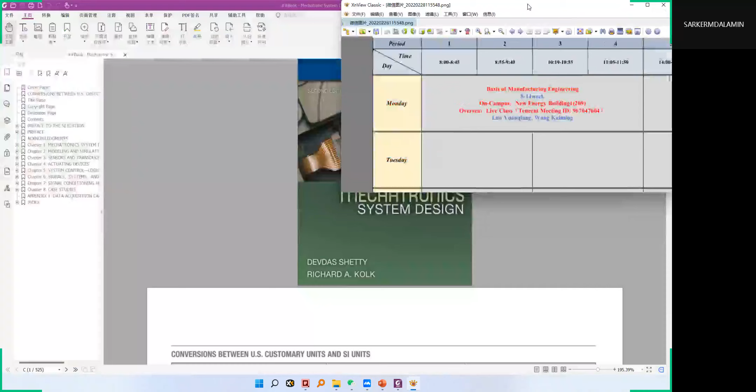This is the book for our class. Laoshi, do you have the PDF version of this book? Yeah, this is the PDF. Can you send it in the WeChat? Okay, no problem.

You belong to class 1 or class 2? Laoshi, it's combined, it's the same class. Yeah, it's combined. Okay.

I give you the PDF version of Mechatronics, you can read it by yourself. Thank you. Now I have the PPT, you can read it.

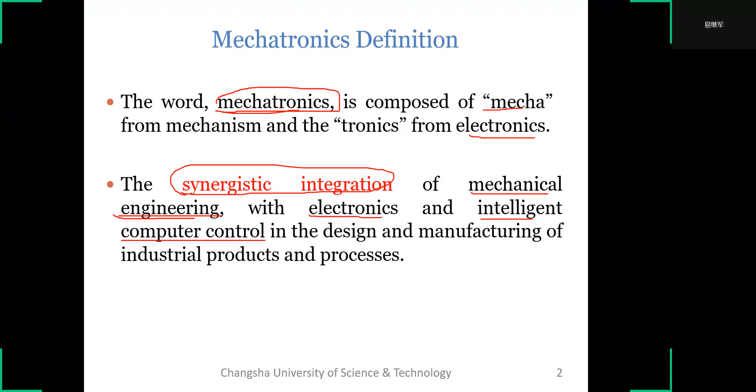Mechatronics is the application. Mechatronics is a methodology. So we know mechatronics can be thought of as an application: complex decision making to the operation of a physical system. Or we can think of mechatronics as a methodology used for the optimal design of electromechanical products.

In the last semester, we learned something about electromechanical technology. So in mechatronics, we may review the electromechanical technology.

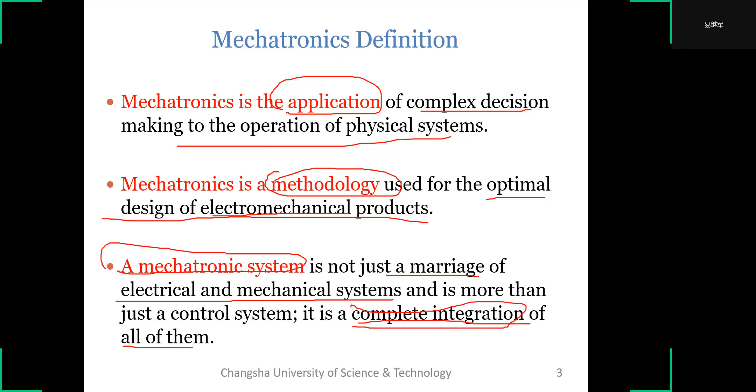Mechatronics definition: Mechatronics engineering is about analysis, design, manufacturing, integration, and maintenance of mechanics with electronics through intelligent computer control.

Analysis - we need to know how to analyze mechanical products, such as FEA, finite element analysis.

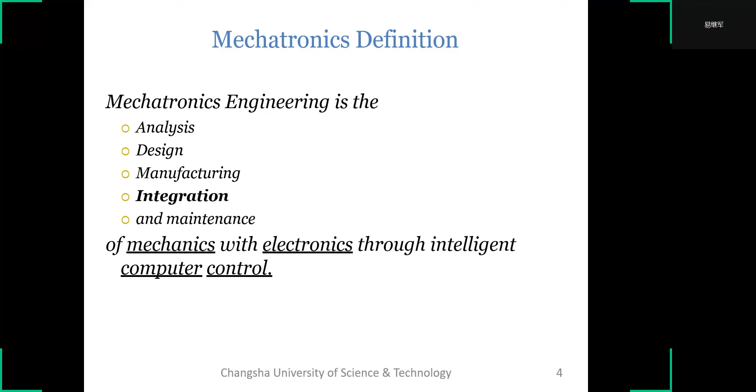This is a diagram that shows mechatronics as the center of many disciplines.

The center is mechatronics. Mechatronics consists of mechanical systems, electromechanics, electrical systems, control electronics, control systems, digital control systems, computer, and mechanical CAD.

This discipline puts them together, integrates these disciplines together, and we can get mechatronics.

This is a mechatronics product: aerospace, medical, xerography, defense systems - this is a consumer product. Manufacturing, material processing, automotive - this is technology, this is mechatronics, this is the product of mechatronics. From this figure, we know the relation between the product, the technology, and mechatronics.

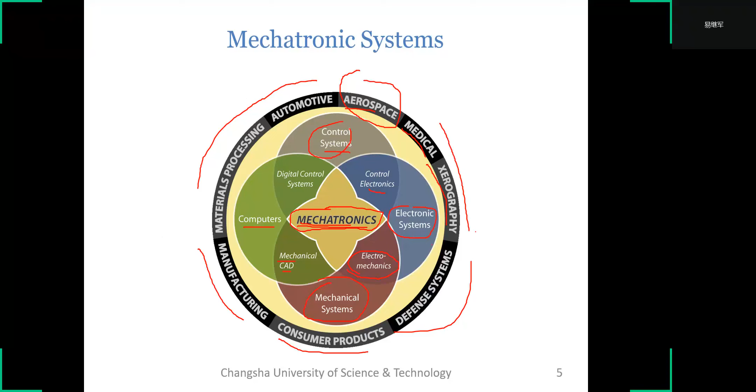Now I introduce the history of mechatronics.

Mechanical engineering. Laoshi, can you please mute all the microphones? Oh, okay.

Mechanical engineering experienced exponential growth in the early 19th century because of the industrial revolution, growing fast. After that, after the rise of semiconductors, semiconductors and computers have revolutionized all engineering products and processes, which in turn affect mechanical engineering.

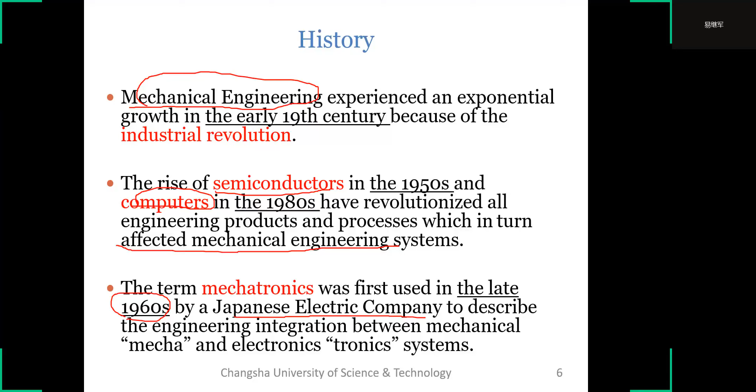Since then, it has spread throughout Europe and is growing in the USA. Today, many mechanical systems use some form of electronics and computers to control its function, its functionality. Mechanical system engineering has gained much recognition and importance in the industrial world.

Today, we know many products use mechatronics technologies to make the product more modern and more beautiful.

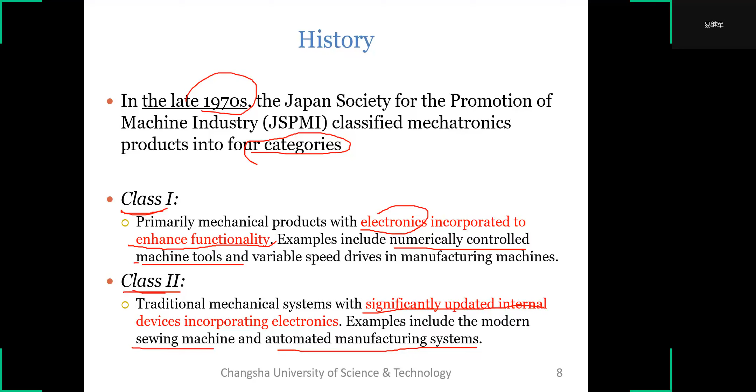Class 3: systems that retain the functionality of the traditional mechanical systems, but the internal mechanisms are replaced by electronics. An example is the digital watch. The old type of watch is a machine, but now the watch is an electronics product.

Class 4: products designed with mechanical and electronic technologies through synergistic integration, which means mechanical and electronic technology work together, they cannot work separately. Examples include photocopiers, intelligent washers and dryers, rice cookers, and automatic ovens. This keyword is synergistic integration.

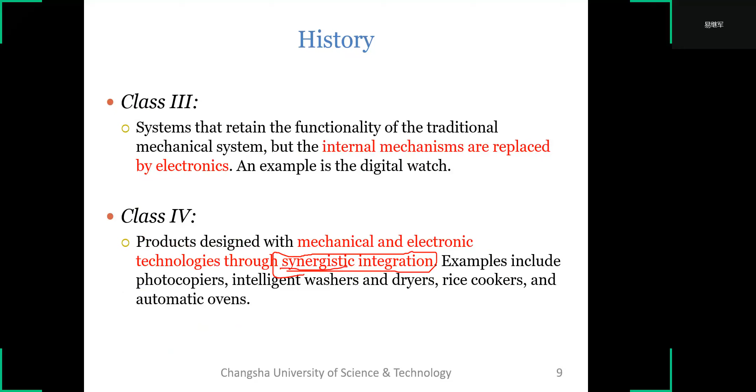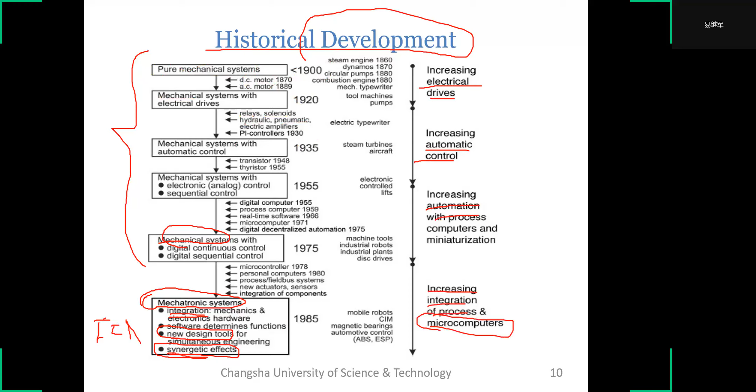The key point is the synergistic effect. We can see the history of development. From this figure, we can see mechatronics follows electronics development - electrical drive and auto control, automation, increasing integration of process and the microcomputer. This is the evolution of mechatronics.

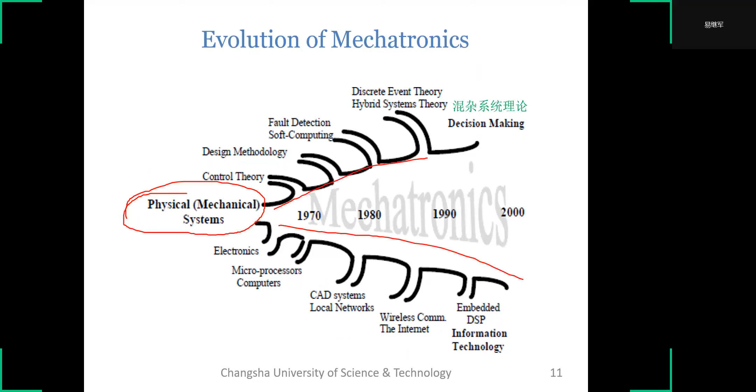Firstly, we have the mechanical systems. When we have the wheel of mechatronics, we can see two branches: this is about control, and this is about electronics.

Control theories, design methodology, fault detection, discrete event theories, hybrid system theory, and decision making. Control systems used to make the decision for the control systems, used as software.

This is the development of electronics used as hardware: microprocessors, computers, CAD systems, local networks, wireless communication, and the internet. Embedded DSP, information technology. Now electronics is combined with information technology.

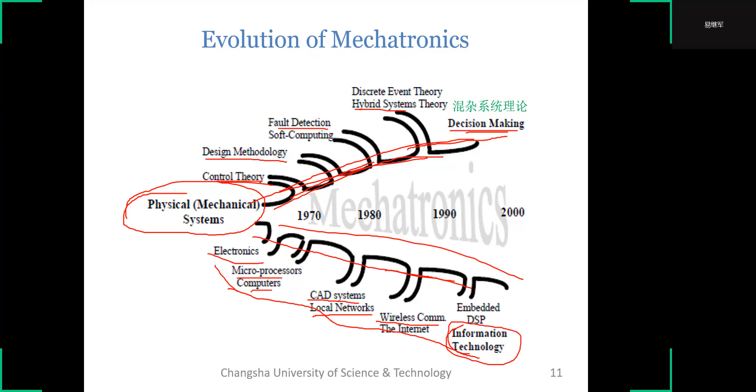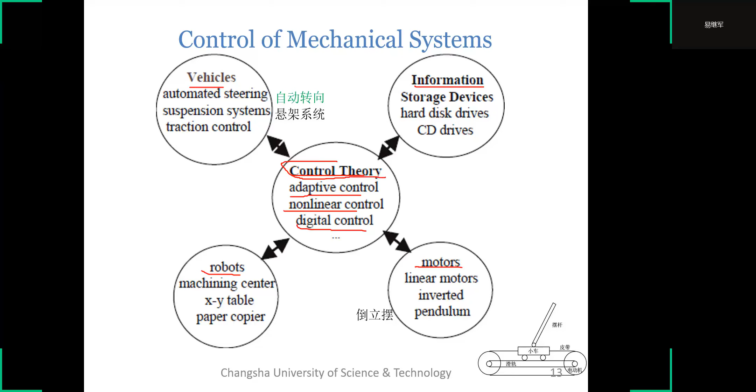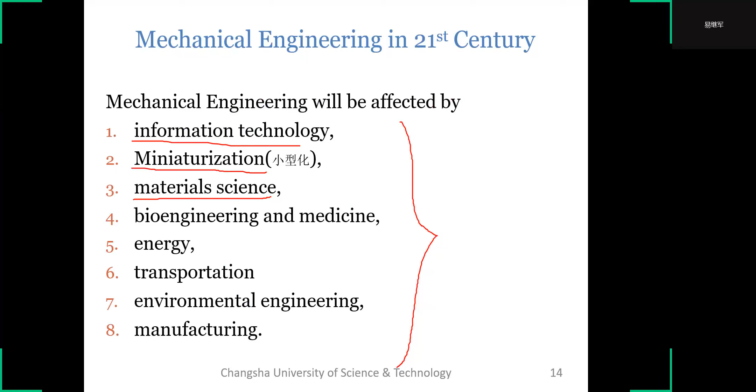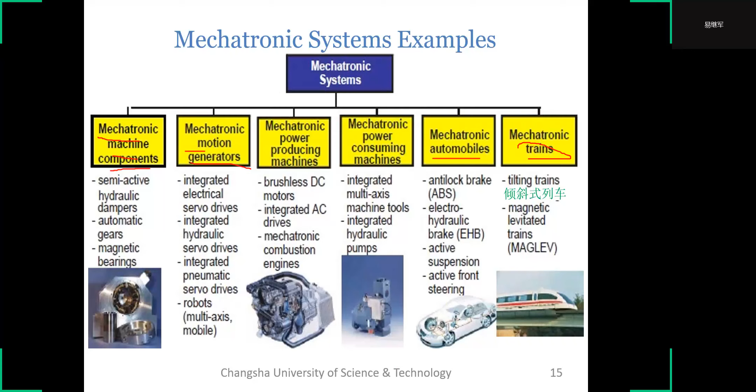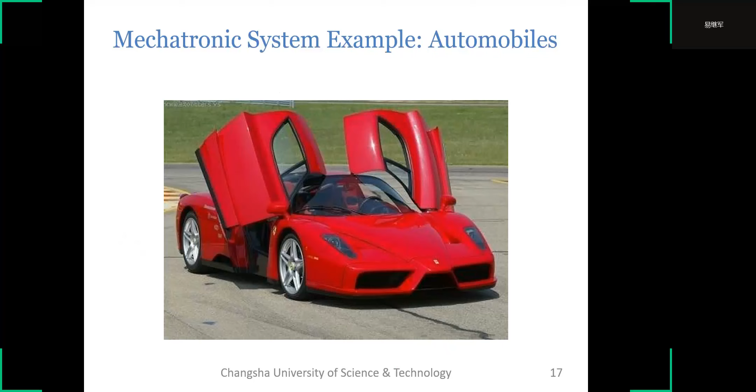Next, I introduce a typical mechatronical system example: the automobile. When the automobile was invented, it was a pure machine. Until the 1960s, the radio was the only significant electronics in automobiles.

The radio was the only electronics; all other functions were entirely mechanical or electrical. They worked separately, not together, such as the starter motor and the battery charging systems. They worked separately, not with the mechanical parts.

Before 1960, modeling of the combustion process showed that for increased fuel efficiency, there existed an optimal time when the fuel should be ignited. This optimal timing depends on load, speed, and other measurable quantities.

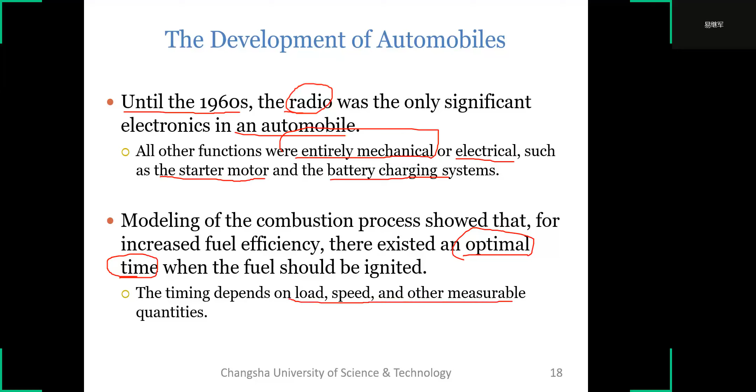The electronic ignition system was one of the first mechatronic systems to be introduced in the automobile, in the late 1970s.

The electronic ignition system consists of a crankshaft position sensor, camshaft position sensor, air flow rate sensor, throttle position and rate of throttle position change sensor, and a dedicated microcontroller that determines the timing of the spark plug firing.

The controller is a microcontroller. So after the successful application of electronic ignition systems, ABS was introduced into automobiles in the late 1970s. ABS is used for brake systems, to prevent the wheels from locking when we brake.

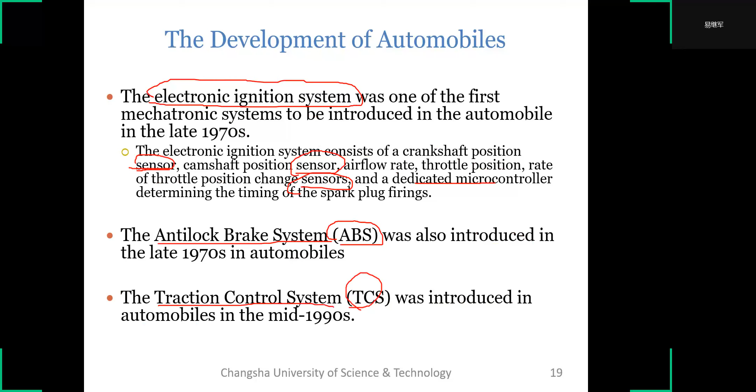In the development of automobiles nowadays, there are about 30 to 60 microcontrollers in each automobile. These processors are used for engine management, transmission control, airbags, ABS, TCS, VDC, etc., instrument cluster, air conditioning systems, seats, mirror control, and window lift systems.

These systems can work separately, controlled individually by microcontrollers. Last semester, we learned something about microcontrollers, so now we can use them in mechanical products.

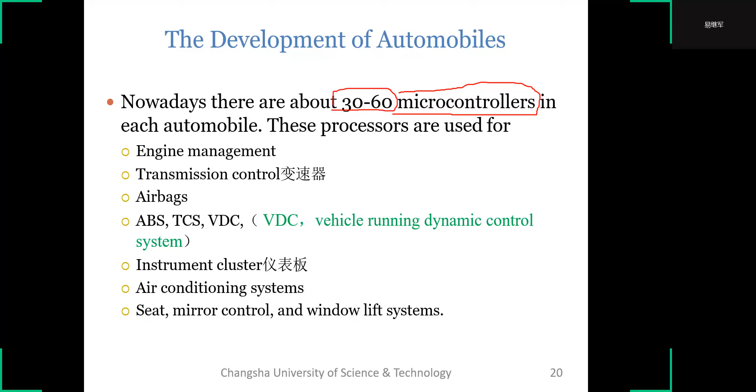New applications of mechatronic systems in automobiles include semi-autonomous to full autonomous automobiles, safety enhancements, emission reduction, intelligent cruise control, brake-by-wire systems, wireless network of automobiles to ground stations, and vehicle-to-vehicle communication.

Telematics combines audio, hands-free cell phone, navigation, internet connectivity, email, and voice recognition.

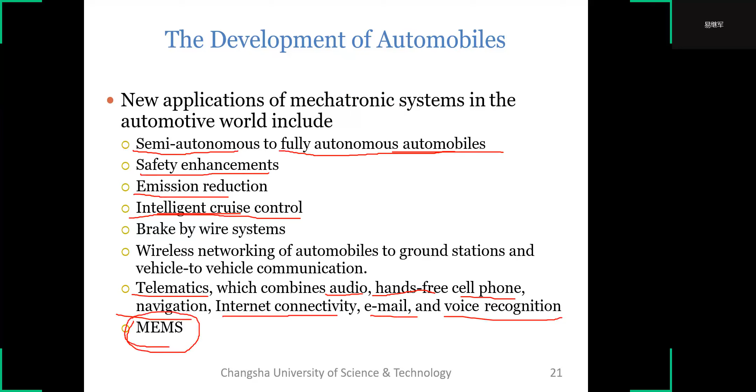This is micro electrical mechanical systems, or micro electromechanical systems. These technologies will be applied to modern automobiles.

This is an example of autonomous vehicle systems. Maybe you've heard about autonomous vehicle systems, which means no driver in the car. If you want to make an autonomous vehicle system, you need to add certain elements to your system.

These include radar, a CCD camera, and DGPS or FOG-based dead reckoning. If you add radar to the system, you need a radar imaging processor. If you use a CCD camera, you need a Matrox vision processor. If you add DGPS, you need a DGPS processor. These are the sensors for the autonomous vehicle system.

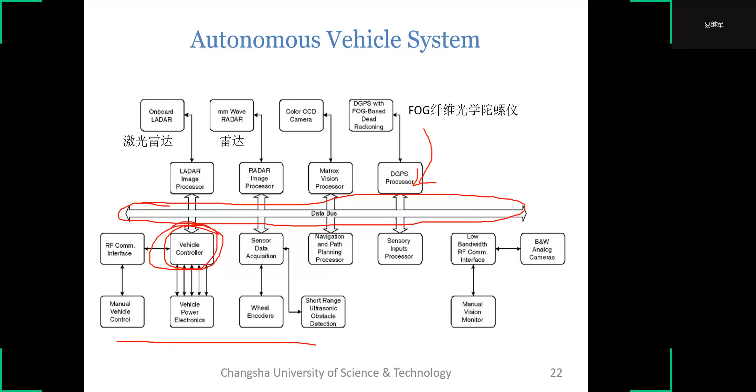From this figure, you know that if you want to make an autonomous vehicle system, you need many elements and parts. But essentially, this is just like a control system: there's a bus, a control center, and sensors that give signals to the control. This is a computer controlled system, and all these parts will work with the vehicle.

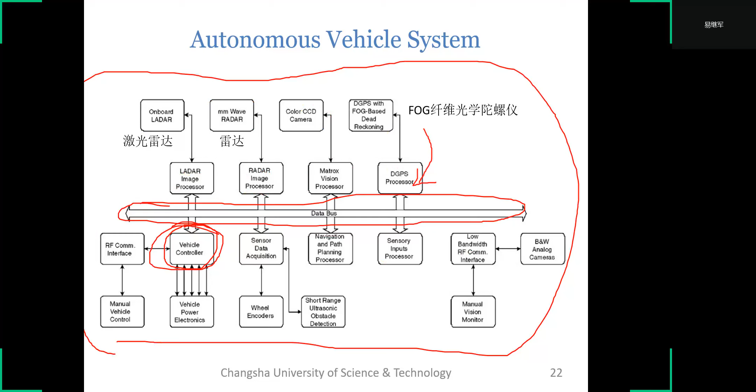So from here we can see mechatronics is an evolutionary process, not a revolutionary process. Mechatronics is developed from mechanical systems, so it's an evolutionary process. Mechatronics is about the synergistic integration of mechanical, electrical, and computer systems.

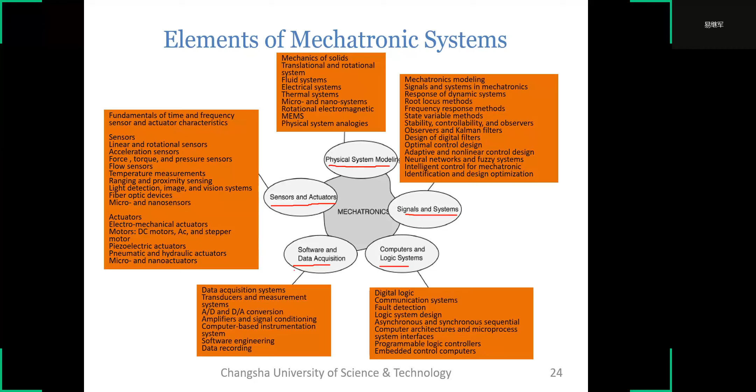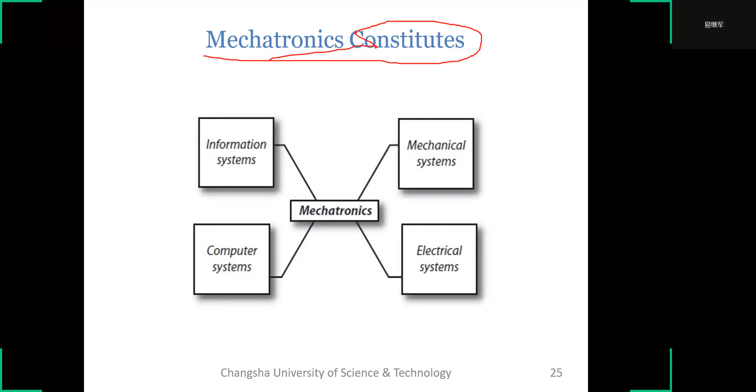Here is a simple diagram. Mechatronics constitutes information systems, mechanical systems, computer systems, and electrical systems. Firstly, mechatronics is made of mechanical systems and electrical systems. Now, mechatronics includes information, computer, mechanical, and electrical.

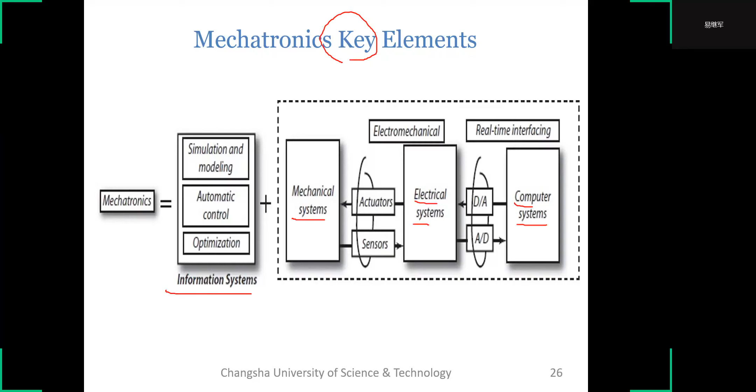Mechatronics key elements are shown in this diagram about mechatronics. From this diagram, we can see the key elements: information systems, mechanical systems, electrical systems, and computer systems. Information systems include simulation and modeling, automatic control, and optimization.

Mechatronics is the basis of mechanical systems. Mechanical systems are driven by the actuator. The signal comes from the electrical systems. The electrical systems' signal is from computer systems. So the signal flow is from the computer system to the electrical systems to the mechanicals. After that, the signal is fed back by the sensor to the computer systems. So these are the key elements about mechatronics.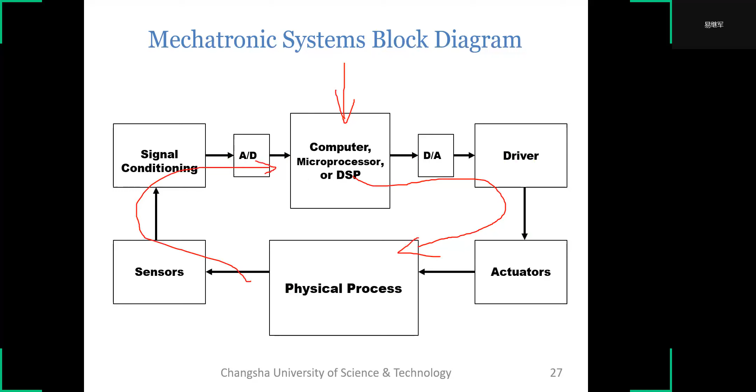Mechatronical systems block diagram. Here I introduce mechatronics and the difference between mechatronics and multidisciplinary systems. The difference between mechatronical systems and multidisciplinary systems is not the constituents, but rather the order in which they are designed. The difference is in the order.

Multidisciplinary systems design employs sequential design by discipline. Mechatronical design methodology is based on a concurrent approach to discipline design, resulting in products with more synergy. The key difference is multidisciplinary is a sequential approach, while mechatronics is a concurrent approach.

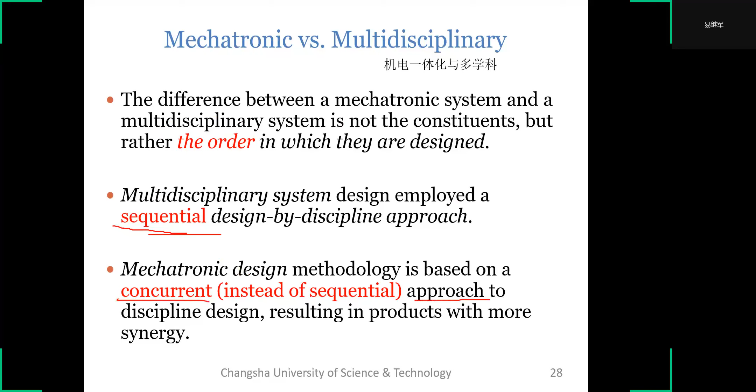So we have the concluding points. Mechatronical systems are composed of several subsystems: mechanical, electronical, and computer control. The integration and interface among these subsystems is essential. Mechatronics is about the synergistic integration of mechanical, electrical, and computer systems. Mechatronical systems are at the high end of technology. This is an overview about mechatronics.

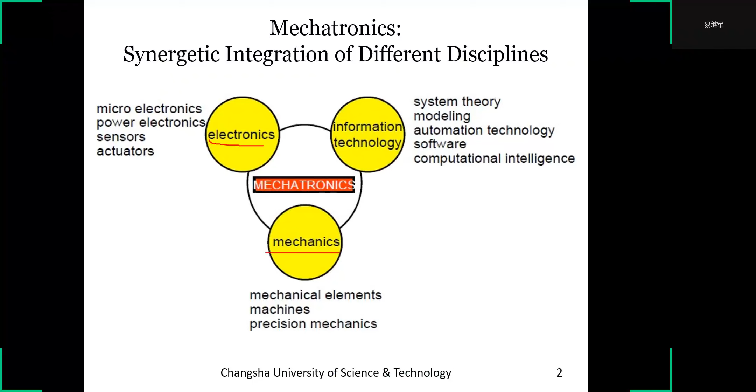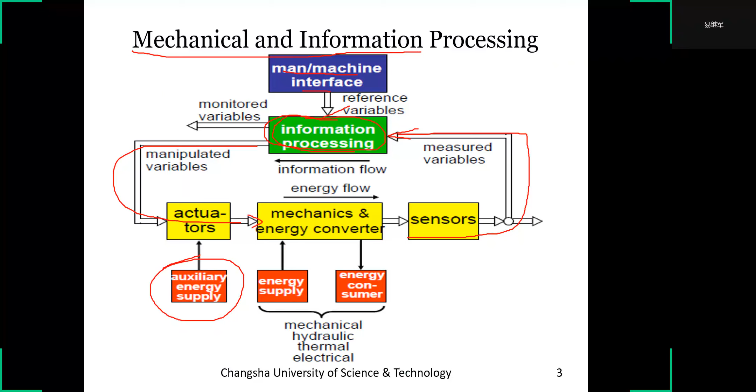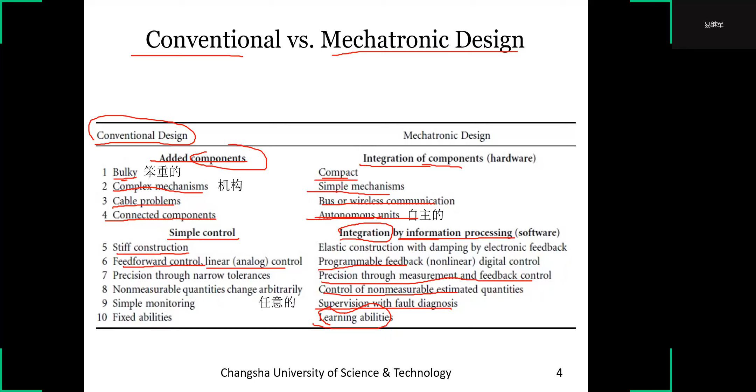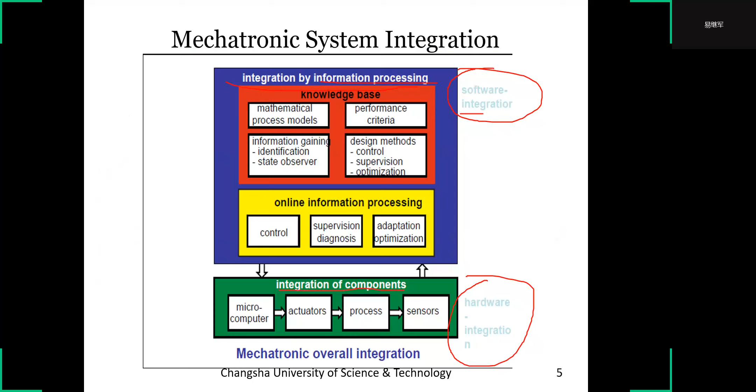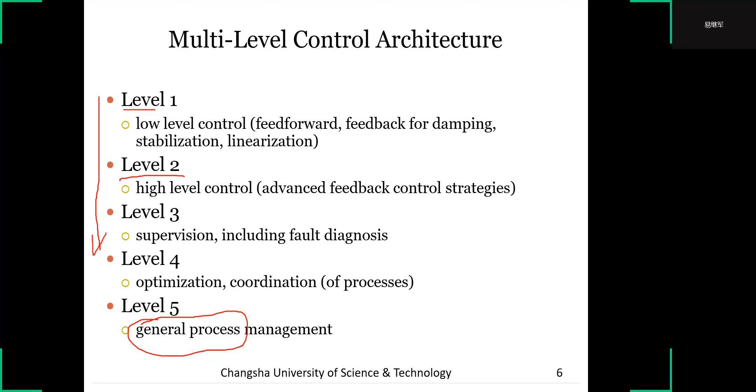General process management is level 5. From here we can see the level gets higher: level 1 is for the basic function, level 2 for high level function, level 3 for supervising and fault diagnosis, level 4 for optimization and coordination, and level 5 for general process management.

If you design a mechatronical product, you always start from level 1. After you realize level 1, you can go up to level 2, then level 3 to level 5.

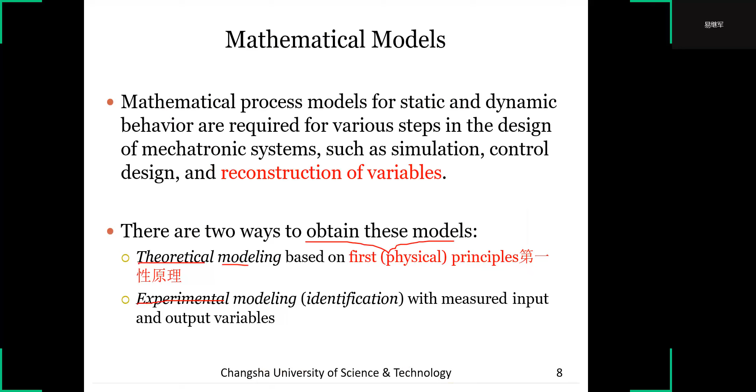After you have the mathematical model, you need the simulation method. Simulation includes digital, analog, static behavior, and dynamical behavior simulation of the control theory.

There are simulation without time limitation, real-time simulation, and simulation faster than real time. These three types of simulation can be used in different products.

Simulation without time limitation is used for basic investigation of behavior, verification of theoretical models, process design, and control system design. This is simulation without a time limitation, just simulating the model.

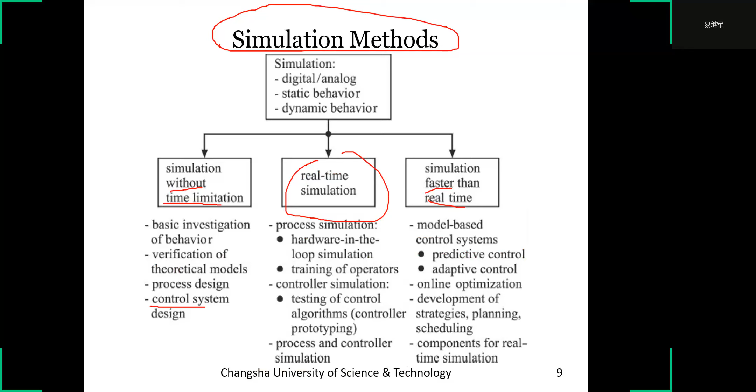There are different types of real-time simulation: real process simulation, simulated control system, simulated process, real control. There are three types of real-time simulation: maybe the process is real, maybe the control system is real, or maybe they are both simulated.

This is hardware-in-the-loop simulation. It is characterized by operating real components in connection with real-time simulation components. Usually the control system hardware and software are real systems, as used for serial products, while the controlled process can either comprise simulated components or real components.

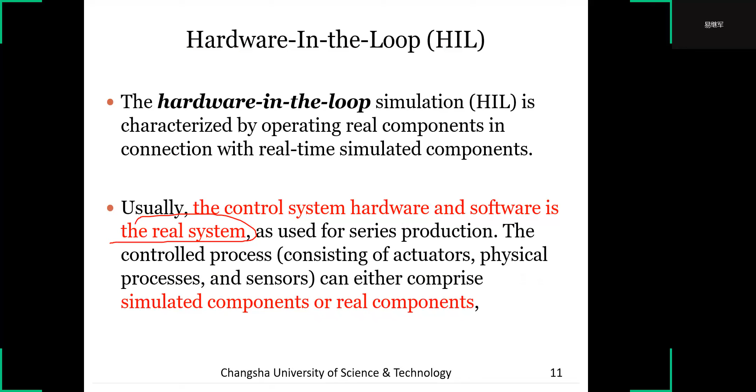PC-based hardware in the loop simulation: this is the connection and relationship between the PC-based software developing on the PC with a cross compiler. When we have the software, we download it to the device and connect it to the hardware with a screw terminal board.

If you want to simulate this device with this product, you can make code on the computer and download it to the DSP to control the hardware systems. If you find some problems, you can modify your software and download it to the DSP again, then simulate it again.

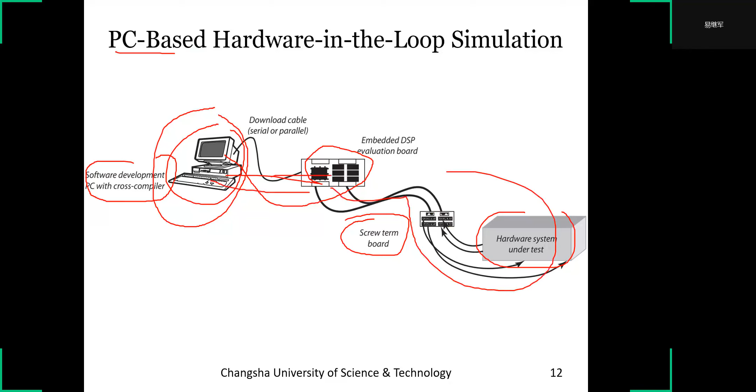Control prototyping is for the design and testing of complex control systems and their algorithms under real-time constraints, using a real-time controller simulation with hardware off the shelf rather than the final serial production hardware. Special ASICs may be performed, meaning when we simulate the systems, we use off-the-shelf processors.

But when we make sure the control is good, we make the serial production hardware for the product. The processor, the actuators, and the sensor can be real. This is called control prototyping.

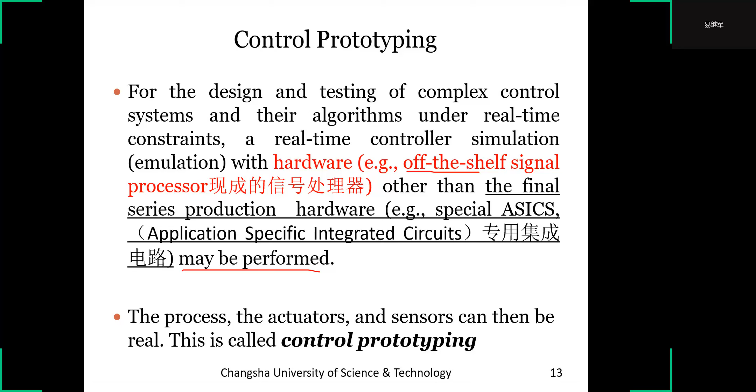Integrated design issues: concurrent engineering of the mechatronical approach relies heavily on the use of system modeling and simulation throughout the design and prototyping stages. It's especially important that it is programmed in a visually intuitive environment. We can use block diagrams, flow charts, state transition diagrams, and bond graphs for the control systems.

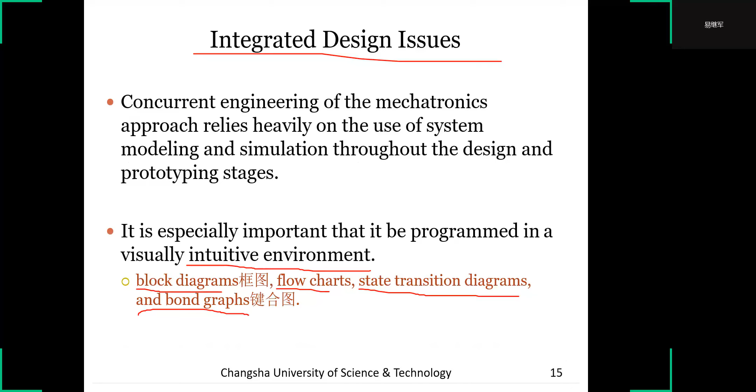Mechatronics is a design philosophy, an integrating approach to engineering design. Mechatronics makes the combination of actuators, sensors, control systems, and computers possible in the design process, starting with the basic design and progressing through the manufacturing phase. Mechatronical design optimizes the parameters at each phase to produce quality products in a short cycle time.

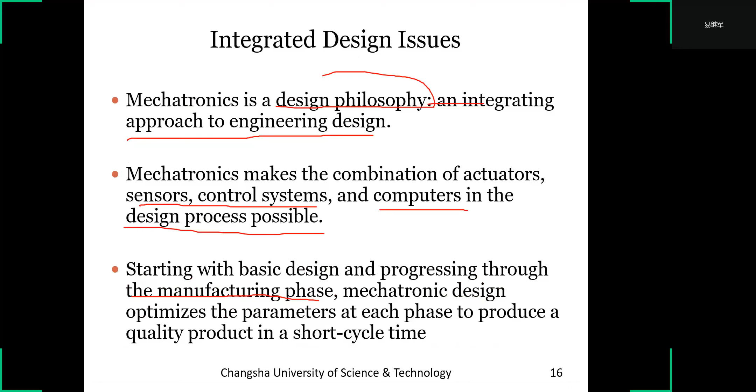There's a difference between modeling and experimental validation. If we use a mathematical model to predict the dynamical behavior, we can use the mathematical model, and the system is validated by the mathematical model.

At the same time, we can use the physical systems to check the actual dynamical behavior, and compare the two results from the simulation and the real systems. So we can change the physical model and simulate again, repeating until the physical systems and the mathematical model get the same result. After that, we think we get a better result.

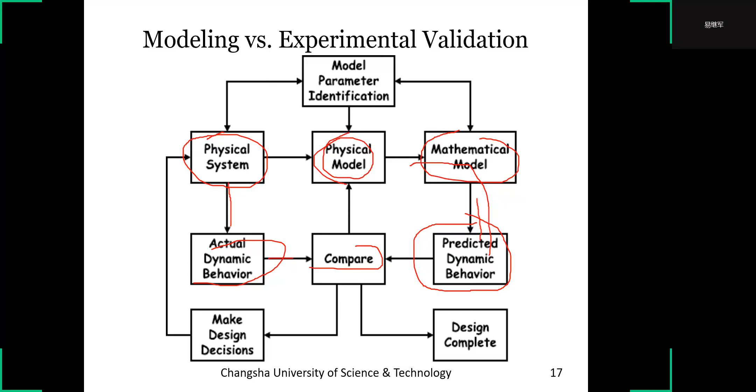Hardware and software integration. Hardware is about the hardware. Software is used in the information process and worked in the computer.

Concurrent engineering is a design approach in which the design and the manufacture of a product are merged in a special way. It is necessary that the knowledge and the necessary information be coordinated amongst different expert groups.

The characteristics of concurrent engineering are: better definition of the products without late changes; design for manufacturing and assembly undertaken in the earlier design stage; process on how the product development is well defined; better cost estimation; and decrease in the barrier between design and manufacturing. These are the characteristics of concurrent engineering.

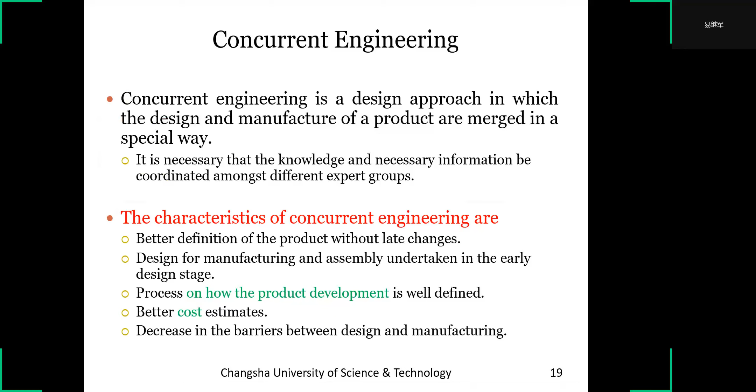In concurrent engineering, we have the requirement definition. We can design the systems for quality, and design for testability, conceptual design for manufacture, marketing, industrial design, and interface design. This work is concurrent.

After we have these designs, we can integrate them together, and get the service and support embodiment and the manufacturing process. So after we have the embodiment, we can manufacture the product, and modify this product according to the customer, or modify the manufacturing process.

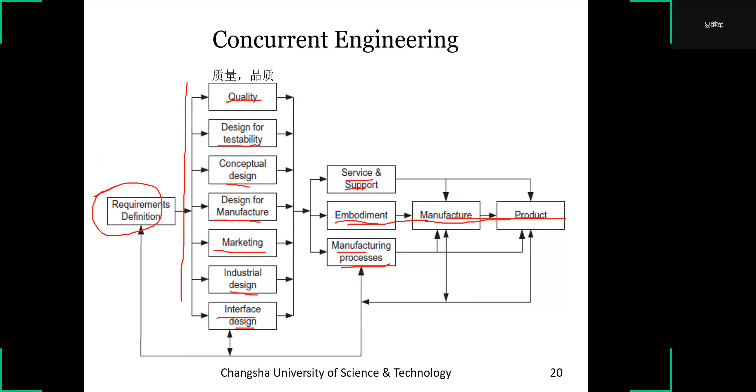Mechatronic system design. Design is an engineering philosophy that can vary between different schools of thought. The mechatronic system design is an engineering philosophy that can vary between different schools of thought.

Mechatronic systems design should follow a well-defined, iterative design process that incorporates synergistic design. It should include the following operations: one, user and system requirement analysis; two, conceptual design; three, mechanical, software, electronics, and interface design; system modeling and simulation design; prototyping and testing.

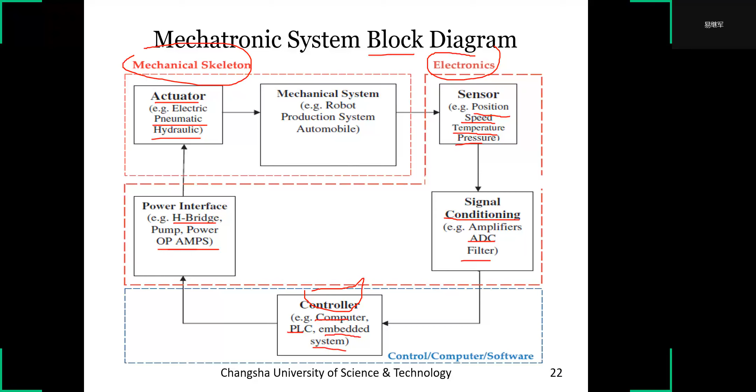Next, I introduce the steps. In the design stage, we include stage 1, stage 2, and stage 3. Stage 1 defines the objective and the specification. Stage 2 is analyze and design. Stage 3 is build and test.

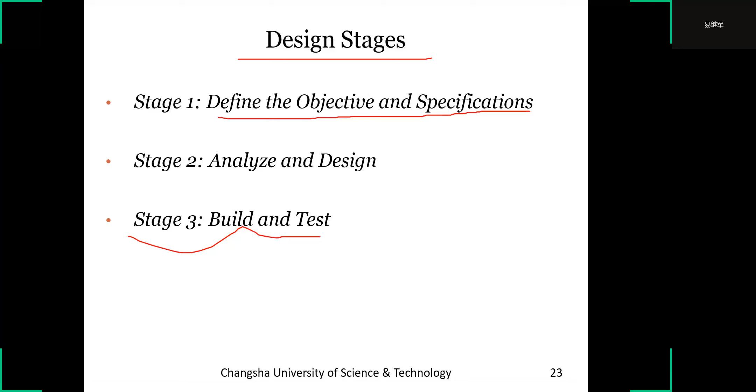Firstly, introduce stage 1: define the objectives and specification. Identify the problem, research and literature review. Set the initial system specification. When we want to design products, we need to know what kind of problem the product requires.

If we didn't know the problem, we need to look for the research and literature which has been done by other people, and give the system specification. This is before we design the product. This is stage 1.

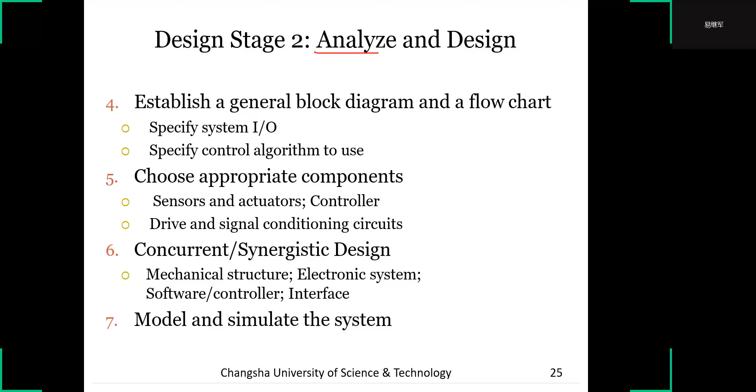Stage 2: analyze and design. Establish a general block diagram and a flow chart. Specify system I/O. Specify the control algorithm to use. Step 5: choose appropriate components - this means choosing sensors, actuators, controllers, drives, and signal conditioning circuits.

Choose concurrent, synergistic design: mechanical structure, electronic systems, software, and the controller interface. This is a difficult part. Model and simulate. This is stage 2.

Stage 3: emulate the controller hardware, build a prototype, test and evaluate, and modify if needed. This is stage 1, 2, 3 for the mechatronic design.

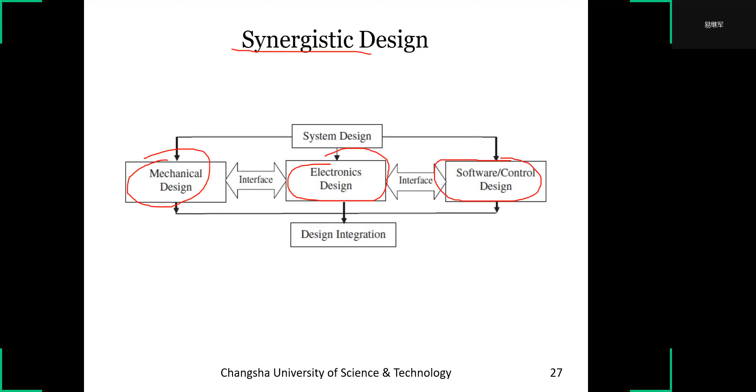Synergistic design: mechanical design, electronic design, and software and control design, system design and design integration. This synergistic design is about step 6.

Mechatronic design process. We can follow these steps with this stage.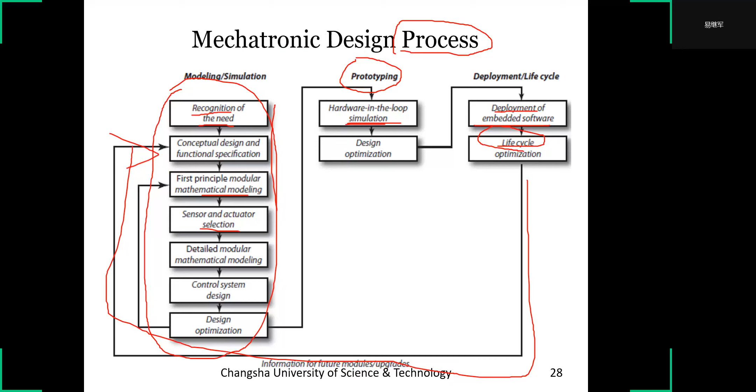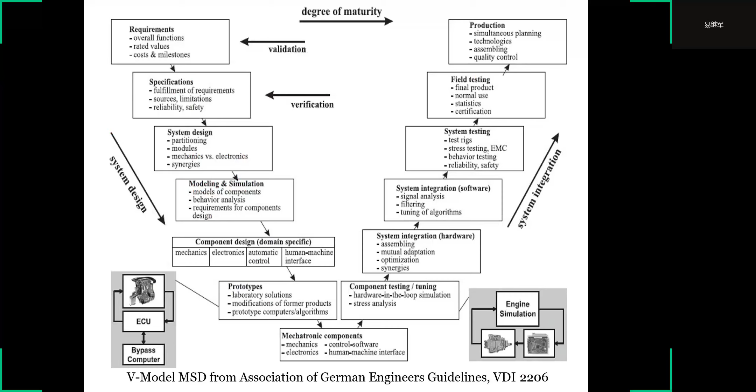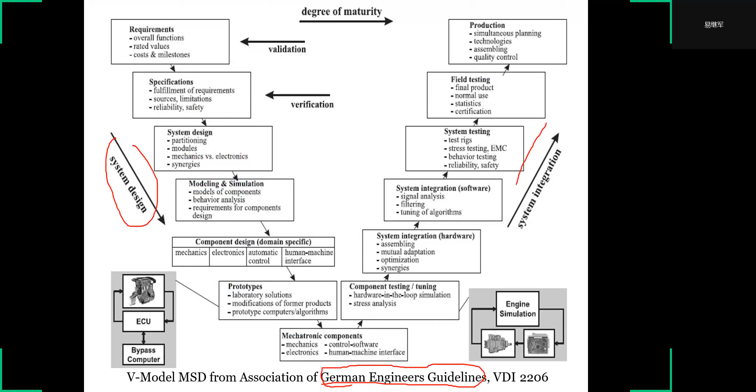This is a process from the VDI model, from the Association of German Engineers Guideline: systems design, system integration. This is a process.

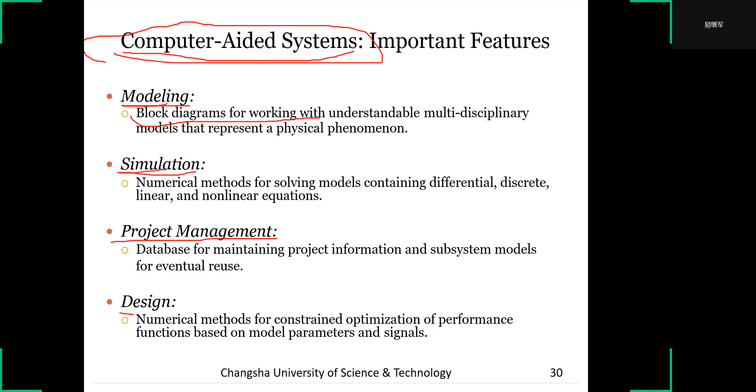Simulation: numerical method for solving models containing discrete linear and nonlinear equations. After we have the model, we can transfer the model to the mathematical model or the numerical method. With the numerical method, we can simulate the model.

Project management: when we design the mechatronics, maybe there's many data. We need a database for maintaining project information and the subsystems model for eventual reuse.

Design: numerical methods for constrained optimization of performance functions based on model parameters and signals. Design optimization.

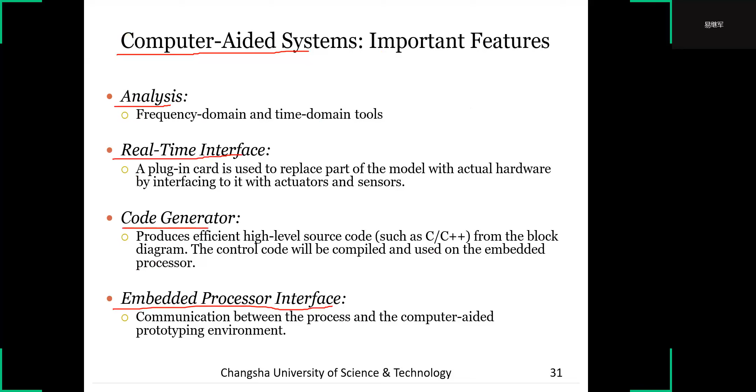Analysis: frequency domain and time domain tools. Frequency domain and time domain analysis.

Real-time interface: a plug-in card is used to replace part of the model with the actual hardware by interfacing to it with actuators and sensors.

Code generator produces efficient high-level source code from the block diagram. We transfer the block diagram to source code, such as C or C++. The control code will be compiled and used on the embedded processor.

Embedded processor interface: communication between the process and the computer-aided prototyping environment. These computer-aided systems are included in the mechatronic design process. So if you want to do some design for mechatronics, maybe you need to learn many software.

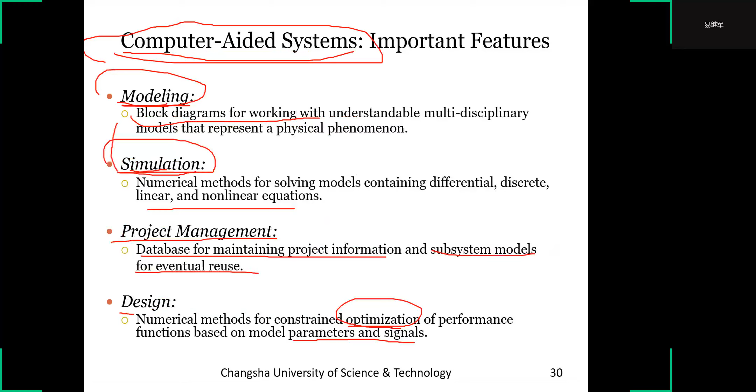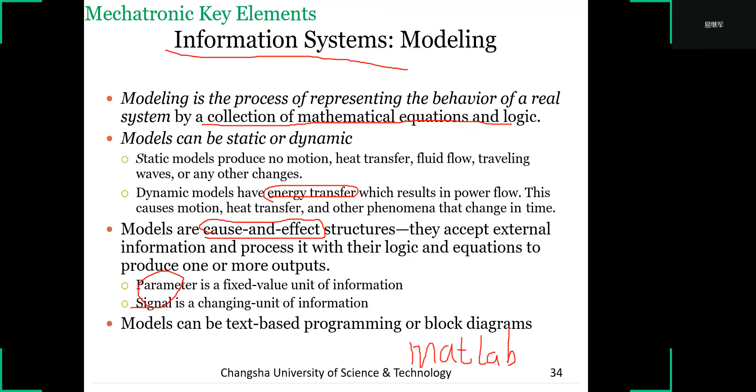Models can be text-based programming or block diagram. If you want to know some specific information about information systems, maybe you need to learn MATLAB. This software is mathematical software. We can use this software to build the mathematical model.

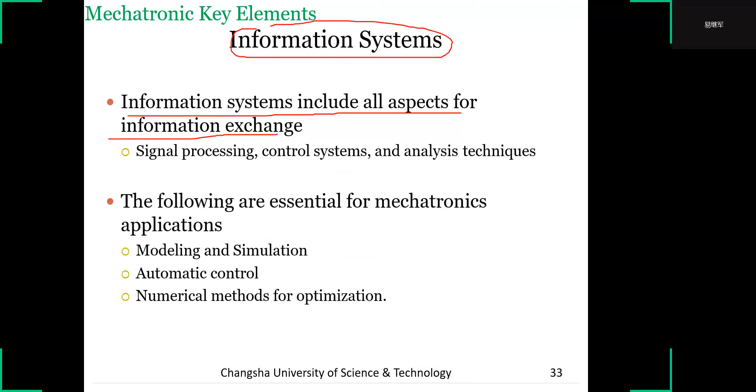The key elements of information systems include modeling and simulation. Mechanical systems: mechatronics key elements are mechanical systems, which are concerned with the behavior of matter and the action of force. Such systems are categorized as rigid, deformable, or fluid in nature.

Rigid bodies assume all bodies and connections in the system to be perfectly rigid and do not deform. Fluid mechanics consists of compressible and incompressible fluid.

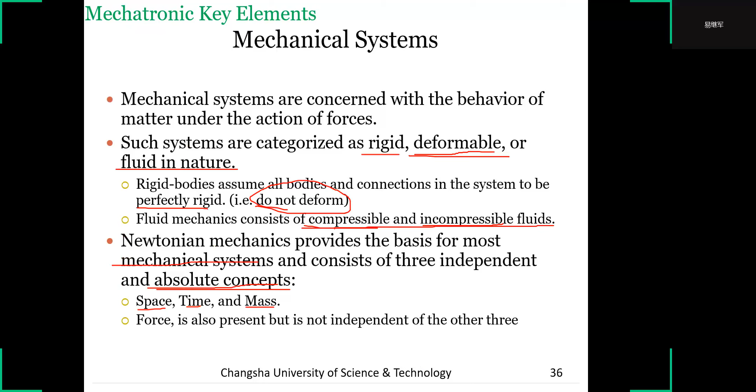Mechatronic key elements. Electrical systems are concerned with the behavior of three fundamental quantities: charge, current, and voltage. Electrical systems consist of two categories: power systems and communication systems. Power systems involve power that is bigger than communication systems.

An electrical circuit is a closed network of paths through which current flows. Circuit analysis is the process of calculating all voltages and currents in a circuit, and is based on two fundamental laws.

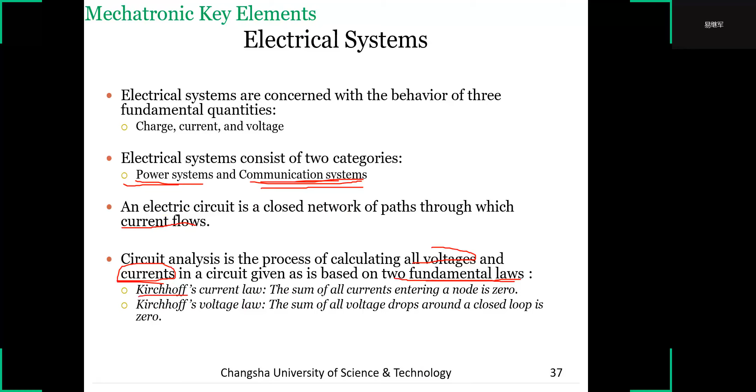Kirchhoff's current law and Kirchhoff's voltage law. Kirchhoff's current law: the sum of all currents entering a node is zero. Kirchhoff's voltage law: the sum of voltages dropped around a closed loop is zero.